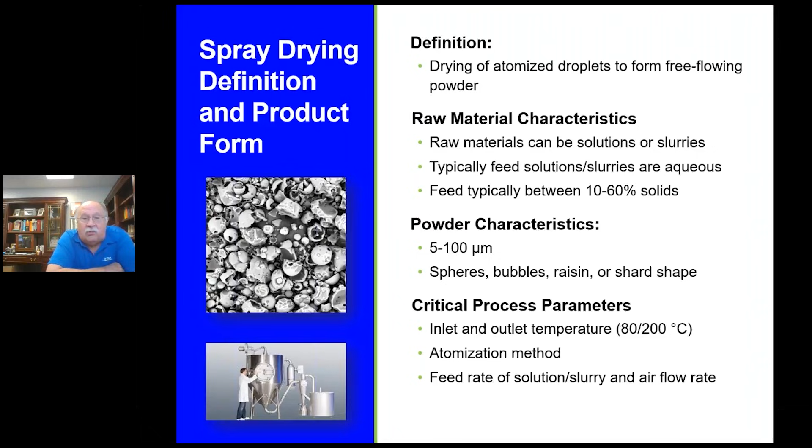The types of dryers people use—I've given some examples here. This isn't the complete list, but starting on the left side with the Buchi spray dryer at the top, this is a little teeny lab dryer, about 2 foot tall. If you're doing very small samples, this is a great piece of equipment to have. We don't find it useful for what we do.

We actually start out with the mobile minor. The next one down is about a 3 foot diameter chamber, as opposed to the 6-inch or 8-inch diameter chamber on a Buchi spray dryer. Many of the samples we'll talk about today were made in a mobile minor. It's a great place to start.

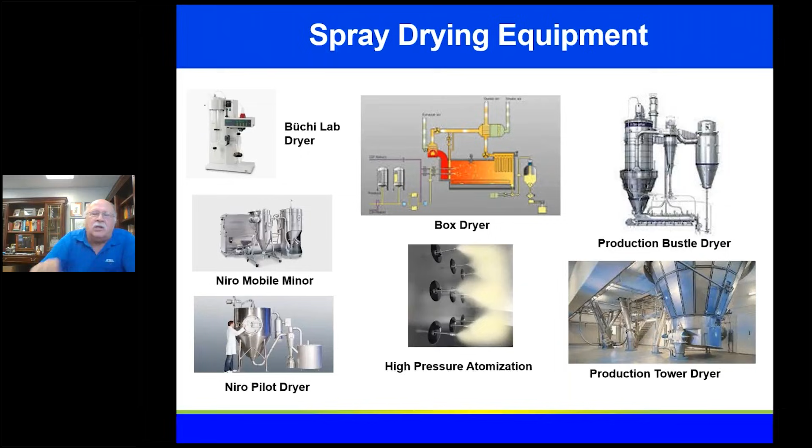However, in today's world, people are using mostly tower dryers, as shown by that production spray tower dryer. These dryers can be immense. As I mentioned, the mobile minor might be 3 foot in diameter, but a production tower or spray tower might be 30, 40, 50 feet in diameter and 100 or more feet tall. So these are huge, incredibly huge pieces of equipment. We're going from drying grams of product an hour to drying multiple tons of product per hour.

Now, some important aspects I want to focus on today are the atomization methods, because the droplet you make tells you a lot about the size of product you get, and at times can even tell you about the shapes of the particles. If you look at the upper left-hand part of the screen, this is a cross section—a schematic of a dryer that has an atomization region and a drying region. When you look at the spray chamber, what you're really looking at is how much capacity you have in your dryer. Obviously, the bigger the dryer, the bigger the drying region, the bigger the particle you can get. We'll talk about that a bit more later.

If you look at the atomization, I want you to focus on the picture in the middle, the rotary atomization. I call it Rayleigh breakup. This is a type of atomizer that's used on big dryers, used a lot in food and ceramic types of drying. Basically, you're pouring liquid on a rapidly spinning disc. In this case, the disc might be going anywhere from 6,000 to 20,000 RPM.

If you have it set up just perfectly, you'll get these nice ligaments coming off the dryer. This is a liquid ligament that comes off, and then it breaks up in a very controlled fashion, called Rayleigh breakup. If you can get your dryer to operate like this, you can get a very tight particle distribution. People, when they really work hard, will use a rotary atomizer to get that tight particle distribution.

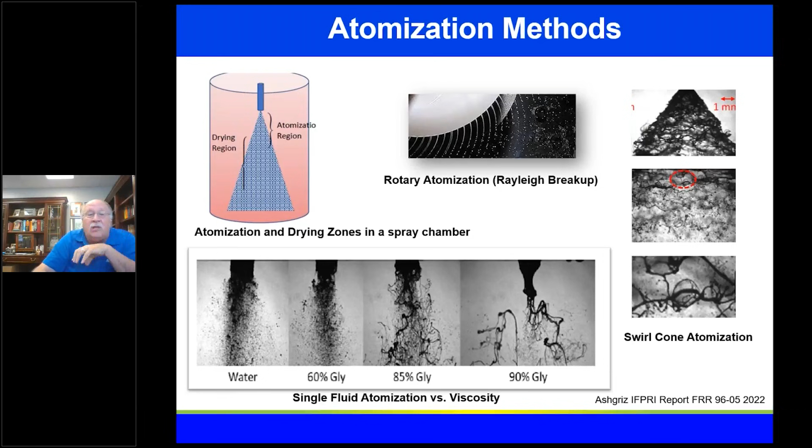Understanding your atomization technique and picking the right one is absolutely critical. You can totally mess up your system by having something too viscous, or get too fine or too large particles if you're using the wrong atomization technique. Many of the characteristics we're looking at is, can we get that right particle size? Where particle size is important, the other part that's important is, what's your final form of the product?

This is a couple of diagrams from another IFPRI paper done by Andrew Bayly, who did an absolutely excellent job looking at all the different types of particles that can be formed. This was a wonderful review, and I want to go through this step here, because I think it's very interesting.

If you start on the left side with your initial droplet, the atomization is completed and we're now starting to dry the product. As you dry the product, the droplet starts to shrink, and eventually it's very likely you'll form a skin around this particle. Depending on the temperature you're drying at, the viscosity, the load of the particles, and the material, you can dry this to a nice solid sphere, as shown up at the top.

But that sphere, before it gets there, can break and form shards, and that's what this SEM picture in the upper left-hand corner shows - shards that form, but you can also see droplets, beads and bubbles that were formed. What happens when they break like this is you've heated it up enough that there's still liquid inside the system. It's not diffusing fast enough through, and it will actually shatter the particle and make shards.

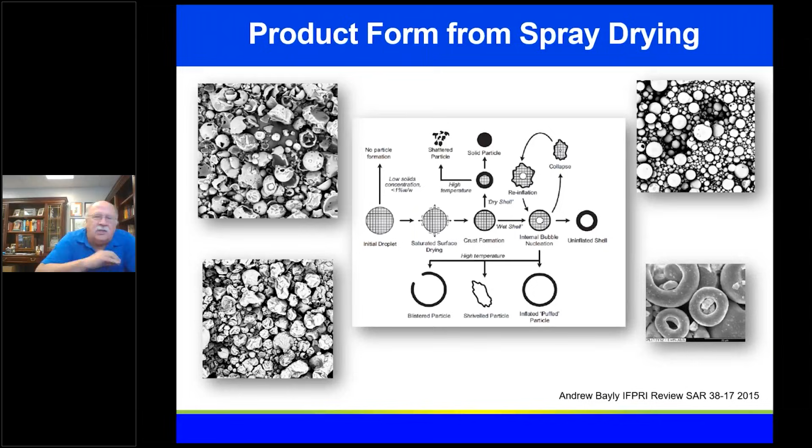Let me give you another view of what's going on with this mechanism, and we'll talk about this later in the talk. In this system, up in the upper left-hand corner, we're looking at the evaporation of a section of the droplet. As the particle is evaporating, it's shrinking, and two things are going on: the particle is shrinking, and the solute—either the particles in solution or the molecules in a slurry or solution—are they redistributing rapidly, or are they starting to collect at the edge?

Obviously, collecting at this edge is going to make that shell type of particle. If it collects a lot at the edge, you're going to get a hollow bubble. What we're looking at here is a dimensionless number called the Peclet number, where we compare the advection rate, the evaporation rate, versus the ability of the particles to realign themselves. If the Peclet number is high, it's drying faster than you can move the particles around, and you'll form a skin.

This is shown, once again, by pictures out of Bayly's review, where at a high temperature you start to form that—a high Peclet number—because it's evaporating very rapidly, and you'll form spheres, or excuse me, bubbles. But at a low Peclet number, a low evaporation rate, you'll form solid spheres.

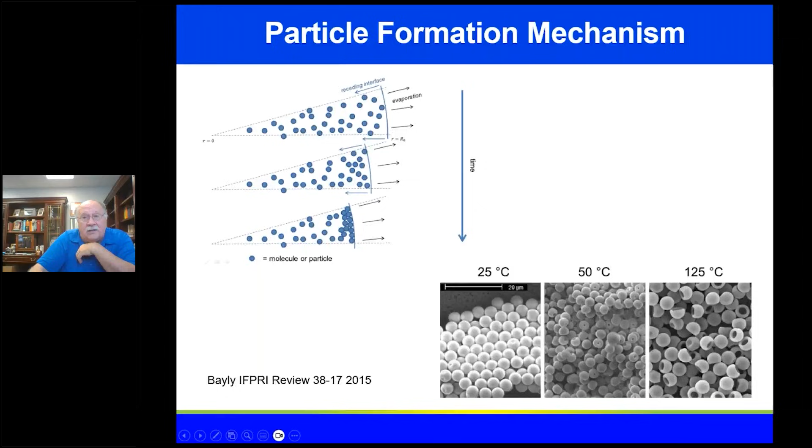Let's just talk about the economics of spray drying. In general, when you're doing a big spray drying operation, you want to get as high a yield as you can possibly get, and 98 to 99% yield happens with absolute regularity in large scale drying. The process parameters you're looking at are the input solids and the drying rate, and from an economic standpoint, you want to get somewhere between $500 and $1,000 an hour out of your dryer, whether that's an internal charge or what somebody charges you for drying it.

Overhanging all of this is this incredibly large piece of equipment for large scale processing, which might cost anywhere from $10 to $50 million. So you want to get this thing to work as fast as you can, because you have an expensive piece of equipment. So you're going to dry fast, which means a high Peclet number, which means you're going to get bubbles out of the system.

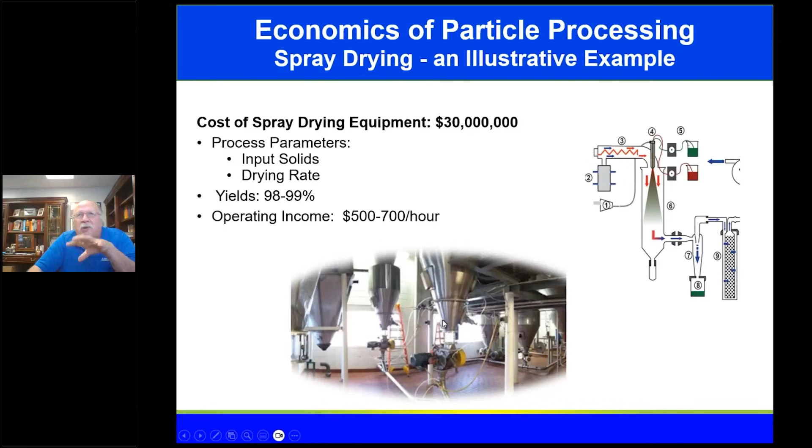So let's take a look at this. We've got this big dryer, we need to fill it up, we need to get a lot of material through here.

What does this really mean for us? So I'm doing an example here where we're having drying at about 2,000 kilograms of water per hour. If I only have a 1% solid solution on a 2,000 kilogram per hour dryer, I'm only going to get out 20 kilograms an hour.

If I've got to make $1,000, I'm going to charge somebody $50 a kilogram for that drying process. However, if I get up to 20 weight percent, I'm at 500 kilograms per hour on a dryer that I need to make $1,000 an hour on. I'm going to charge $2 a kilogram, or $1 a pound, for this. Obviously, if I can get it to go up higher and higher, I can get more out. It still costs me the same amount.

Can I go with a high percentage solids? With ceramics, you can actually get up to 50 to 60% solids, maybe even 70% sometimes, and you can dry a lot of material with a smaller dryer. In food processing, you're typically operating in the 20 to 40% solids range. So for food processing, just because of this big capital piece of equipment, I'm going to need to charge more for that than not.

Now what I'm showing here is that with this drying, as I go up, as I double in volume or percent solids, I actually go up more in output rate. This is just because of the way the math all works out. But you'll see here that I truly want to operate at as high a concentration as I can, because I can get out the most product and have the lowest cost for my system. This shows what happens with big changes, and what happens in reality with small changes.

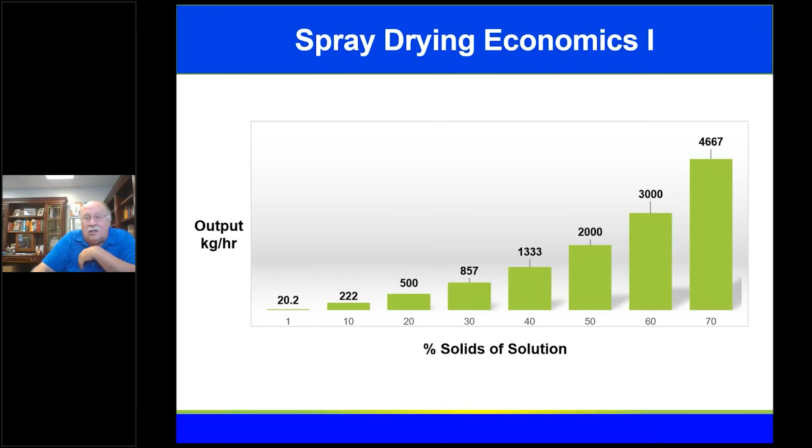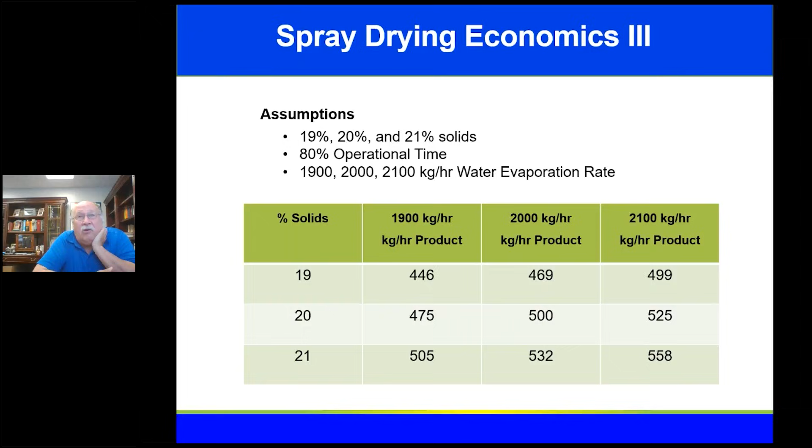Now, the other thing that could happen is that your dryer might not be operating at 2,000 kilograms of water evaporation an hour. So if we go back to that same 19, 20, and 21%, you can see that by operating at higher efficiencies, we can get a substantial amount more product coming out of this system, whether it's at 20%, 19, or 21% - around 50 kilograms an hour. And obviously, if we can do this at higher and longer, or higher and faster rates, we can maximize this. We can get almost 800,000 kilograms a year more out of the system than if we were operating at a lower rate.

So what causes the evaporation rate to change? The answer is: do you have your dryer tuned up properly? Do you have any leaks in it?

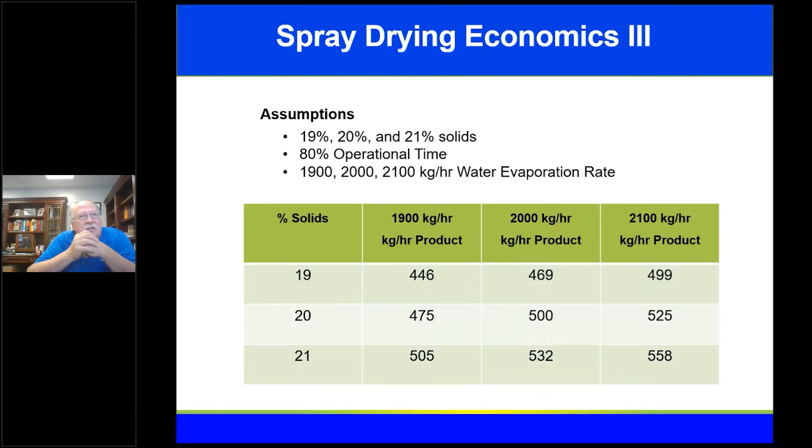If you have an air leak, a dryer is operating at a negative pressure. If you're sucking cold air into your dryer, you're going to have a lower evaporation rate. If you're bringing in air that has a higher relative humidity, you're also going to have a lower evaporation rate. So people work hard to maintain their dryers, keep those leaks out, and they want to operate in Arizona where the relative humidity is less.

The final thing is yield, and this is a funny spot. When we assume 98% yield, if we theoretically have the ability to get 500 kilograms an hour out, we're really getting 490 out at a 98% yield. However, there's a little game we play with ourselves. We calculate the yield based on the percent solids you could possibly get out of there, but in reality there's always water left in your product.

So even though you have 500 kilograms of dry product, at 8% retained water you actually have the ability to get 543 kilograms per hour out of the dryer. But we're only getting 490, and we're still calling that 98%.

But my question here isn't how we calculate our percent yields. My question is, what happened to that other 53 kilograms I've lost? This is approximately 10% of the product that's lost, and it goes into two places. Some of it goes down the drain, when it goes down the drain because you're cleaning up or you've spilled a little liquid, you've lost that yield.

The other part is how you collect your product. If the product is not collected properly, if your cyclone or baghouse is not operating properly, you're not going to have an Oklahoma dust storm coming out of your dryer, but it can be pretty exciting when your collection isn't working. A, your yields aren't as high, and B, there's a lot of people mad that live around you, and you really don't want that.

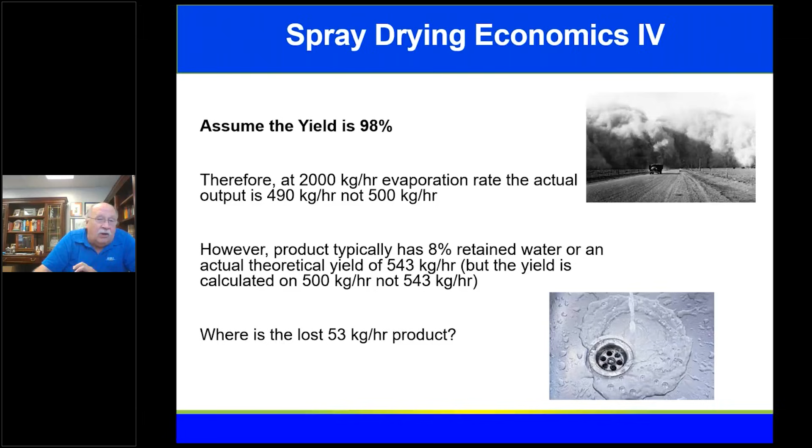The reality is that if you control your process, if you don't have problems, if you're not washing it down the drain, if you're collecting it properly, you can have a much higher yield. I would like to collect that extra half a million pounds of product and save myself another $1 million.

The overview on this is your water evaporation rate depends on your relative humidity, your preventive maintenance, and your operating time in the green. If you can operate a lot, you can improve the economics of your dryer. If you improve, you can have higher percent solids or higher yields, because you're stopping it from sticking in your chamber, losing that, or having poor collection. By improving the percent solids, you're also going to have a better operating dryer.

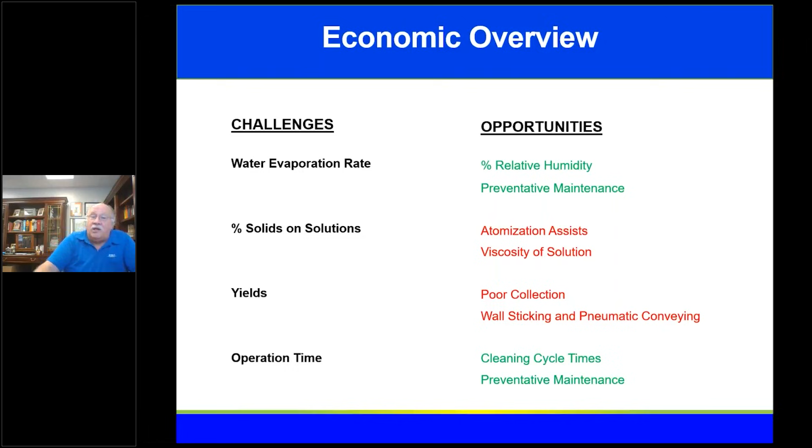Because of the high cost of a dryer and the high cost of operating it, we are always focusing on that. What we're always doing is drying as fast as we can, which puts us back into making bubbles out of this.

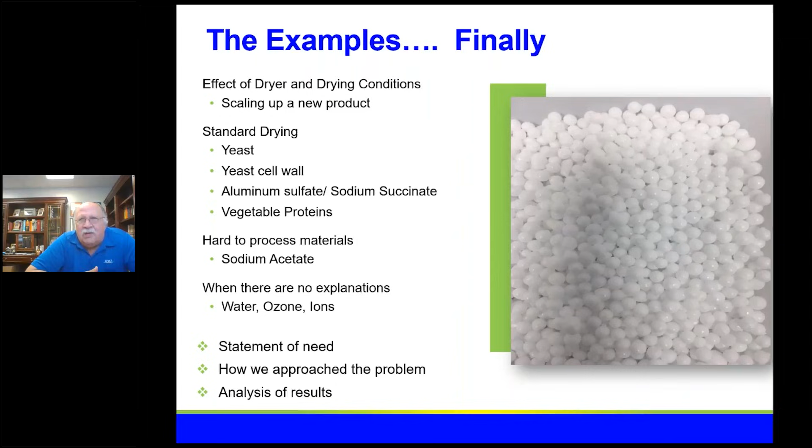So let's take a look at some examples of how we're operating, to give you some view into what's going on in this whole system. I'm going to talk about dryers and scaling up, some easy to dry materials that have some challenges with them, a hard to process material, and finally when your dryer's not operating right, what are the other explanations, what else can possibly be going on. So let's get into these examples.

So, scaling up of a new product. This is what we all do, we start in one of these Mobile Minors that I showed you, we scale it up and see how that goes, and then we finally get to our big dryer. In this particular case, a customer came to us and asked us to dry a polymer for ag applications, and basically we started out in our small dryer. They wanted about 60 to 68 microns, which is what they had from a competitive product.

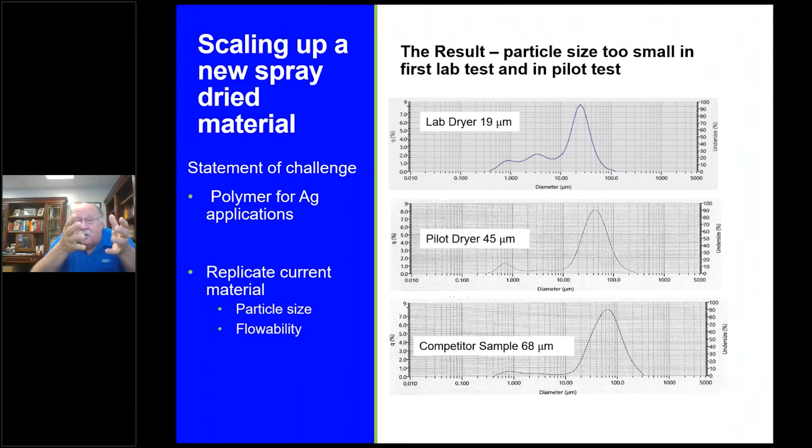First test that we did, we got 19 microns. That's a little off from 68 microns, but we're in a small dryer. Remember, we've got a small atomization chamber and a small drying part of the chamber. We should expect a smaller droplet size in order to get it to dry and not hit the walls. And if we go to a bigger dryer like our pilot dryer, we'll get a bigger particle size, which we did. We went from 19 to 45 microns.

At this point, I have at the bottom here the HORIBA particle size distribution from the competitor's product, and it was 68 microns. We have to now be able to tell our customer, does this make sense? Can we actually take this to a bigger dryer, and is it going to get to that 68 microns? Because it's still not flowing properly. Smaller particles are going to flow less well, and that's exactly what we were seeing. So if we can go to the larger dryer, can we think this is a valid step to take?

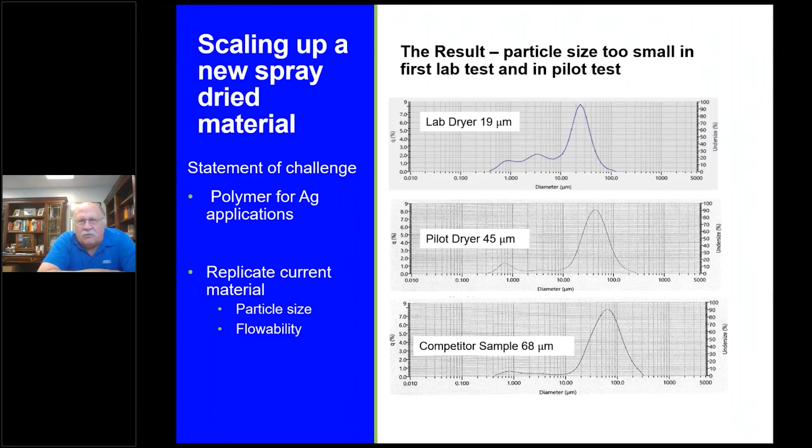We said yes. We think that going to a larger dryer, we're going to get a larger particle size. Now we haven't done that yet, and our customer is still trying to decide whether they want to do it. But we think that just because you have to have smaller droplets due to a smaller chamber size and a smaller dryer, we should expect to see bigger particles.

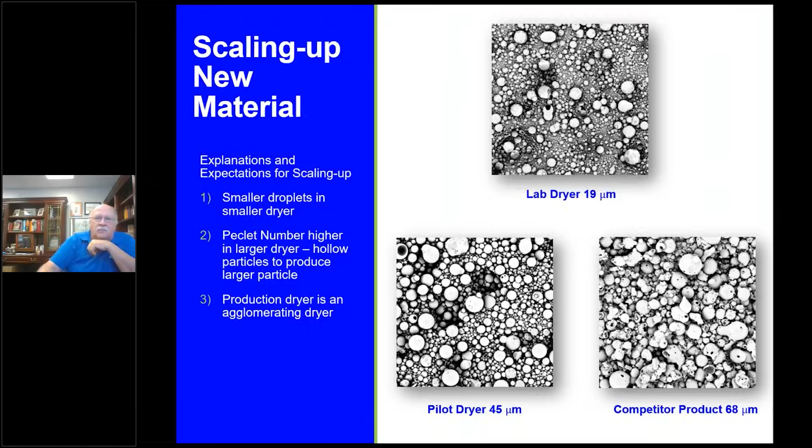What went wrong? Nothing. It's just that there's always tweaks that have to be made, and even in the proof of concept, there will need to be some adjustments. So let's look at another example.

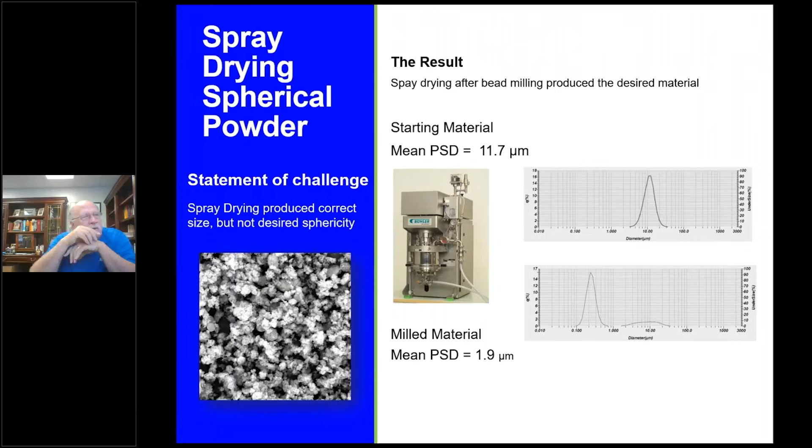What we did is we took this material, we bead milled it, getting it from 11 microns down to 2 microns, and we spray dried this material again. And lo and behold, we went from this odd shaped particle to nicely spherical particles.

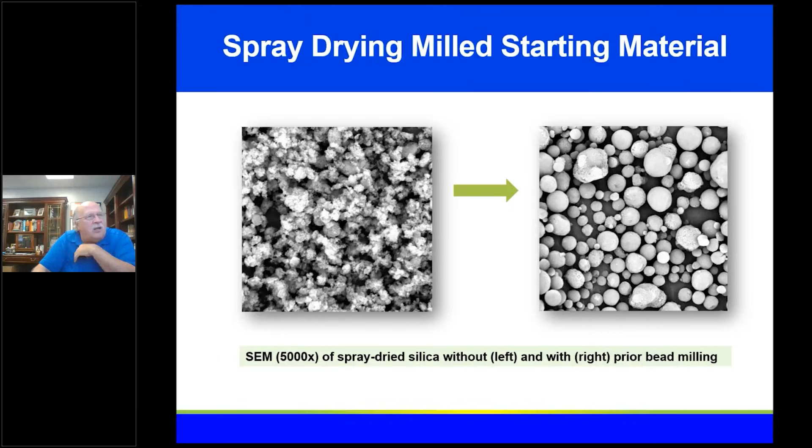Once again, this really looks like a solid beaded particle. There's some indication here of some hollow particles, but not many. We got exactly what we wanted on this first try. This is what we like to see. Understanding what we're doing and trying to come up with the right solution is always the right thing to do.

Now, one of the things happening in this next example is there's a lot of interest in the world right now in vegetable proteins. I like it, I think if we had more vegetable proteins, we'd have less global warming. But this is interesting, what's happening?

What was interesting, and we don't really quite understand what happened here, is we got 3 different particle sizes out of this. A particle size of 64 and 55, I'll call that the same, and that's exactly what we expect to see in spray drying. But one material ended up with 92 microns, which is highly unusual to get out of the dryer, even though they all have the same structure with that skin formation collapsing.

We're not really sure why this happened. One of the things that could have happened is that protein number 2 could have had a higher viscosity even at the same percentage solids, which means it's going to form a smaller or larger droplet. That could be the reason.

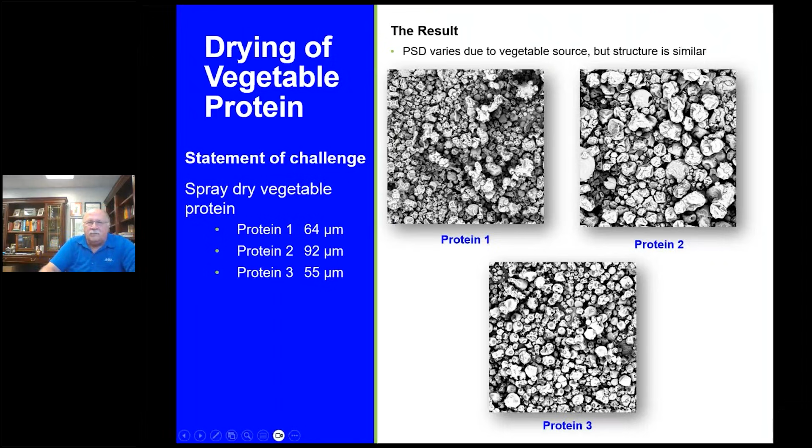It could be that this material has a particular stretchiness that allowed it to balloon out farther, forming first the bubble and then the balloon, and then collapsed. We're not really sure, but this was a remarkable point for us to get this large particle size, same structure, that raisin structure, but a larger particle size. Sometimes you just don't know - you have to run the experiment and see.

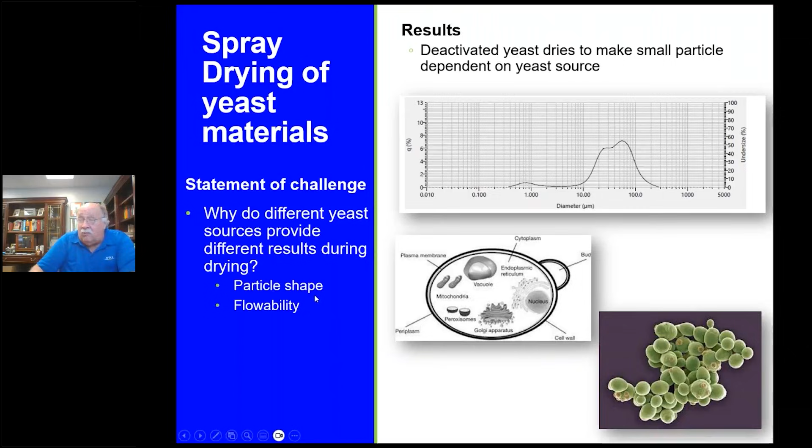But the shape we're going to see in just a second, and the flowability, changes dramatically depending on the particle. What we think is going on is that these dried deactivated yeast, sometimes when you deactivate and dry them, they break, and some of that lyses and internal components come out. This yeast extract is sticky, there's a lot of protein in it. We think it's acting as a binder. Having different amounts of binder available, or no binder available, is going to give you different strengths.

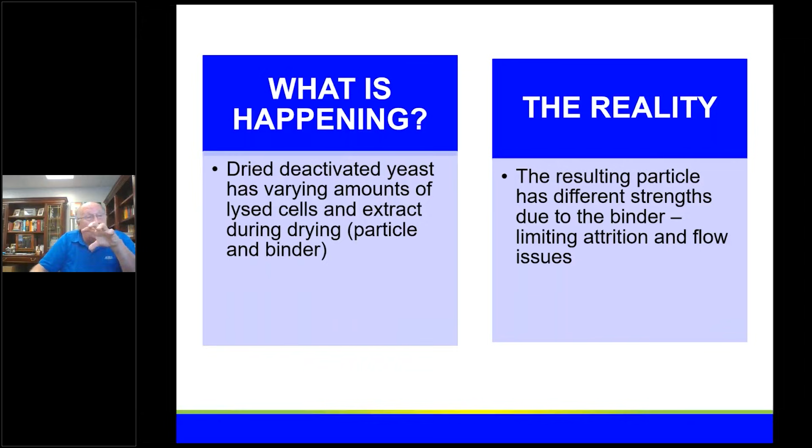You're going to have attrition, small particles, and small particles are always bad when you're looking at flowability. So here's 3 examples of 3 different yeasts that we did. Let's start on the right side - you can see nice bubbles that have formed, you can tell because of the holes, the black spots on these. And if you look closely, you can actually see the individual yeast particles, either on the low mag or the high mag.

If you look at the far left, it's that raisin type structure again. And how can you get a raisin type structure when you have a lot of particles put together, unless there's a lot of lysing going on, a lot of this protein - and we know from a previous slide that protein forms this raisin-like structure. You can also see at the high mag version a lot of the individual yeast particles. We think what's going on is you have 2 different cases, very similar size, that should dry the same, but because of this extra binder or protein in the system, you can actually control what's going on and make all kinds of different particles with different flowability.

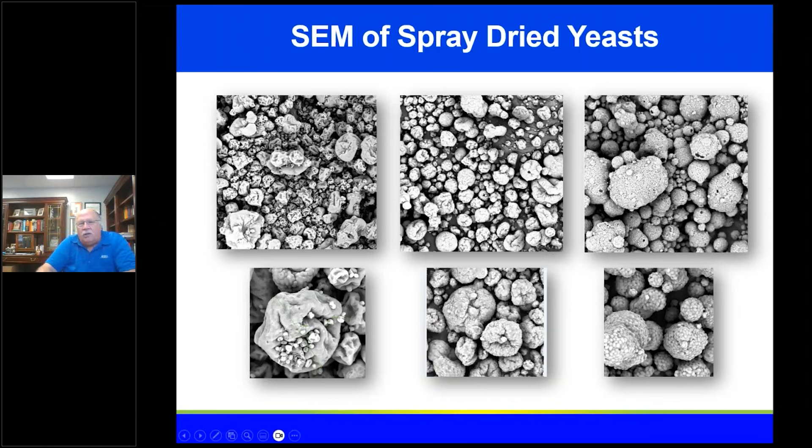The one in the middle has a lot of protein in it because we specifically lysed that one on purpose. So it's everything all together, and it's actually forming that raisin-like structure, making it harder to see the individual particles than in the one on the right. So once again, knowing the materials and knowing how to control it can make all the difference in the world.

I've got two more examples to give you, both about crystallization. Going back to that article by Andrew Bailey on particle shape, he reported some examples that a man named Vehring reported in 2008 of spray drying sodium chloride. Aren't those pictures in the upper right hand corner amazing? Sodium chloride crystals formed in a bubble formation around that particle.

We were drying something - we didn't know about this at the time. We were drying sodium succinate, and we got a nice drying, as seen in this bottom left-hand corner. But when we looked at it broken open, we saw an incredible crystal structure here. So we were forming bubbles, but we were also forming sodium succinate crystals.

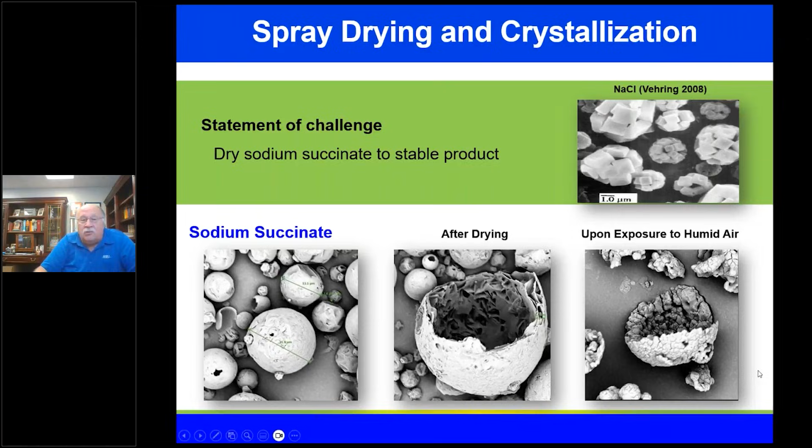What was interesting is that when we left this material - we took it out of the dryer and put it on the lab bench to take a look - when we came back, it had almost deliquesced. It picked up so much moisture. We formed the bubbles, we formed crystals, something we hadn't seen before but have now seen other times. But that particle was falling in upon itself, so we didn't form a stable particle in this case, and we had to handle this very carefully. We actually scaled this up. It worked out well, but if you did it on a humid day, it was a real disaster.

This is my last full example, and thank you all for listening. I want to talk about hard to dry materials - in this case meaning they can pick up moisture and they're cohesive. The one we've spent a lot of time working on is sodium acetate.

You're basically taking vinegar or acetic acid solutions and neutralizing them with sodium hydroxide or whatever you want. What we found over the years, and this took us years to see, is that different neutralization endpoints, whether below 7 or above 7, made a huge difference on how easy this product was to dry. The higher the pH you went to, the better off it was - easier for us to dry. Still hard, still cohesive, still picks up moisture. We also found that if we dried during the winter when relative humidity is lower, it was easier to dry.

That's not so surprising - people see this with lots of different materials, but this one showed: not only was it easier to dry, but the flowability of this product at lower relative humidity was also important. Product stability was much more stable if we kept the storage temperature constant and the RH low during drying.

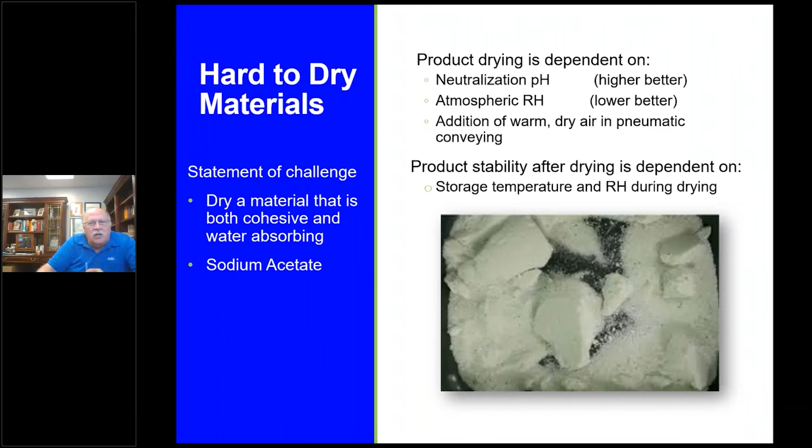The picture I'm showing here is what happens when this stuff was just stored. We had a 50-pound bag of this sodium acetate, stored it for a month, and it turned into a brick. This was as good as it could get - you could break the brick up, but it was agglomerating in the bag. This is not unusual - salt does this, sugar does this. But this one, we're not drying salt or sugar, we're drying this stuff. So how do we handle it, and what the heck was going on?

When we looked at these particles, they have the same particle size whether it's high pH or low pH. But when we looked at the high pH - it might be hard to see in this image - we could see what appeared to be more crystal forms. So going back to that sodium succinate, sodium acetate also forms crystals when it dries. They form primarily solid spheres, and I'm still a little confused why it's solid and not bubbles.

When you look at the high mag, you can see crystalline shards in there. At the lower pH, there were still crystals, so this is going on all the time, but it also has some amorphous nature. You don't see as much of those shards, and you see a kind of waxy looking particle. We think these are amorphous particles.

What we're seeing is that at higher pH it's more stable, because the crystalline materials dissolve slower than amorphous materials. People see this all over the place, particularly in pharmaceuticals. They're always looking at this.

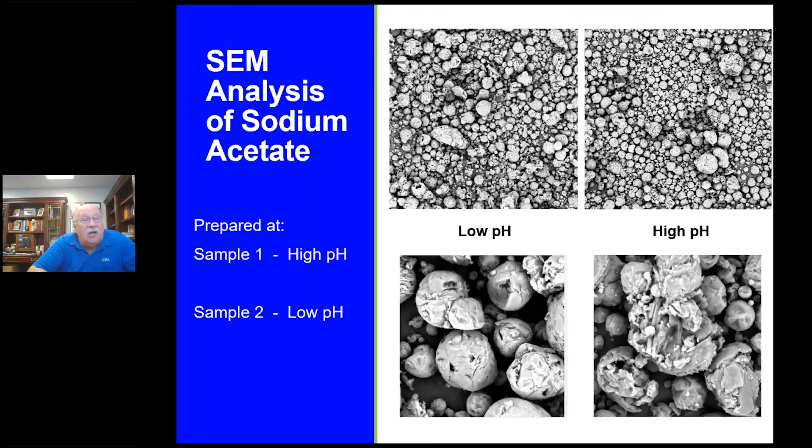In this case, that lower solubility just means that any moisture, whether in the dryer picking up moisture, can start to agglomerate and become cohesive. When you take it out of the dryer, the amorphous material picks up moisture faster and starts to block. By understanding these things, you can get a good idea of how to control your dryer and how to change the process parameters.

As spray dryers, we hate water because it costs us energy to get rid of it, and water, usually high relative humidity, just causes problems. That one's an easy one to understand.

Anecdotally, I had a friend from another company who was spray drying their material, and they noticed that in wintertime they had less of an issue with oxidation, but in summertime there was more of an issue. When he got into the details, the bigger problems occurred when there was a lightning storm close by. He was able to prove that small amounts of ozone, ppm parts of ozone, during the drying process caused a significant change in their product.

Now that's a hard one to imagine. Water's an easy one to imagine — we've seen it — but ppm parts of ozone can affect your spray drying process.

I'll give you one last example, with plasma torches in our building. We were spray drying in one of our plants, and somebody was plasma cutting in our shop, 100 feet away, behind 3 doors, and all of a sudden the metal detector went off in our dryer. This is not what you want to hear — something's broken, a bearing's broken, there's scraping going on. The metal detector detects it.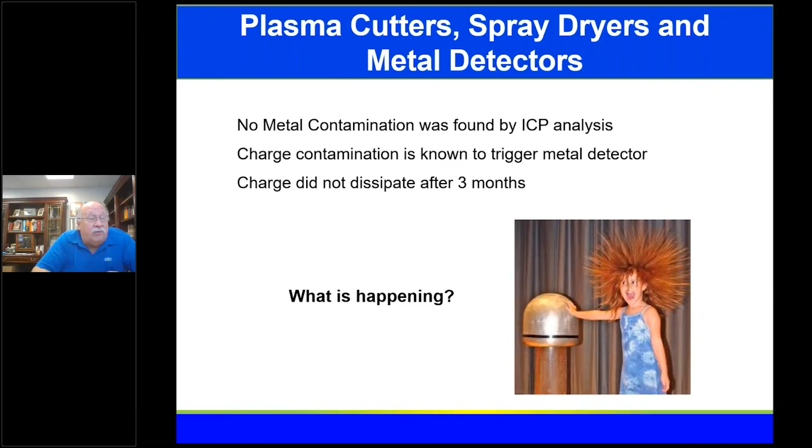These are the sorts of challenges that we see. So even on simple drying that we've done many times, somebody turned a plasma torch on, somebody had an electrical storm, the relative humidity rises. We think we have it all under control and understand it, and sometimes it's just not that way.

So I'd like to summarize. Particle size and shape can be very important for you. Understanding the mechanisms of atomization and drying, and applying these, can help you be a better spray drying person. The economics of drying commercially is that you're going to dry fast, and you're going to probably get more bubbles than not. Understanding that, and knowing how to challenge and play with that, is something we can all do better. I'd like to point out, and I think I say this almost every time, whatever process you're doing in particle processing, the conditions and the materials can be absolutely critical.

Small changes are everything in this business, so just be prepared for a surprise with even simple systems.

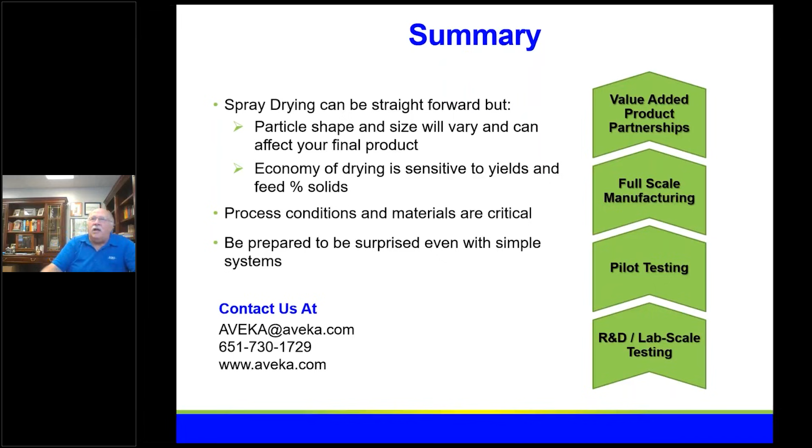What if we have ingredients in the wet mix which are volatile at temperatures above 80 degrees C? That's a great question. One of those volatile ingredients above 80 degrees C is acetic acid. When you don't fully neutralize it, two things will happen: some of that volatile component will evaporate during spray drying. It absolutely has to happen, and we see that in spray drying of partially neutralized acetic acid. However, by the same token, I've seen people, by changing conditions and handling it properly, spray dry alcohol, which obviously has a boiling point less than 80 degrees, and they were able to encapsulate it. It's a great question. You would expect most of that low-vapor or evaporation material to go away, but people have figured out how to keep it in there if that's what you want. Typically though, it's just going to go.

Thank you. The follow-up question is: what is the acceptable particle size distribution of dispersions in the wet mix for spray drying, and also, what is the maximum possible viscosity?